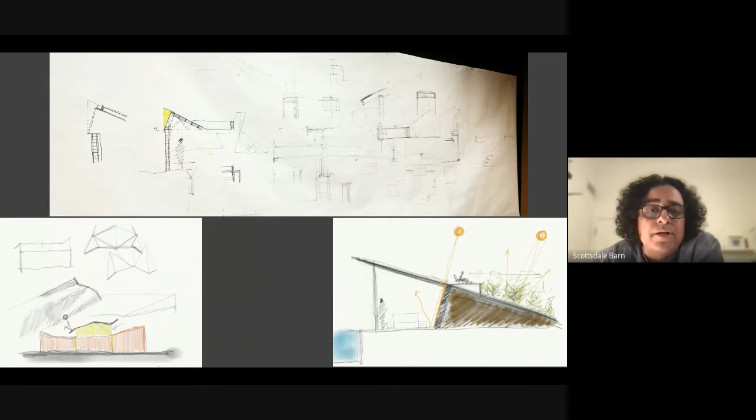On the right side, you're seeing a sort of a very freehand sketch that is talking about the sun, the angles of the sun on the solstice, and how to avoid that in the desert. And on the left side, again, there are discussions about how the sun is being prohibited from getting inside, because it's really harsh - it's about 120, sometimes 118 degrees Fahrenheit temperatures, which translates to 49 or 50 degrees Celsius in India.

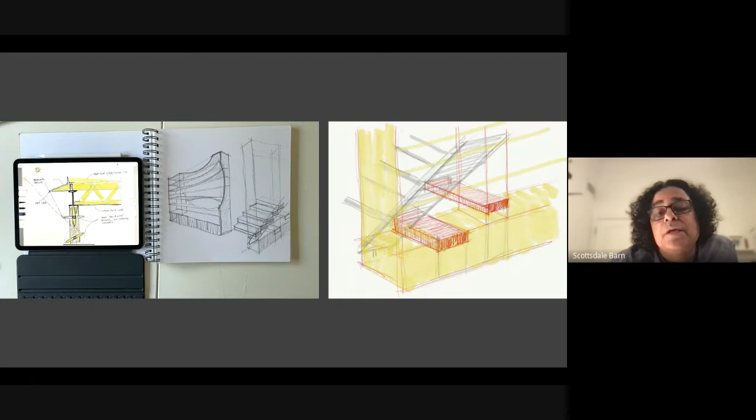And I work through different mediums. Sometimes on an iPad, I'm sketching something, sometimes on a sketchbook, sometimes I take my watercolors out and start sketching. So there's various ways how details can be manifested. You just saw that one detail.

This project right now is almost going to start construction. We are waiting for the permits to happen. It's for a NASA planetary scientist, and I'm interested in the sky, in the sun, in the stars, and all of that.

So this particular angle that you're seeing is actually facing the North Star. And the North Star, the pole star, the Polaris, is sort of the center of everything. Our human-centric Earth and the universe sort of moves around this pole star. And so I wanted to celebrate that.

This is a steel, aluminum powder coated aluminum plate that comes out that holds the glass. And there's a screening element on the top that comes out, and it becomes sort of a sunshade for that particular glass element, especially in the summer suns when the sun is rising low and it's hot.

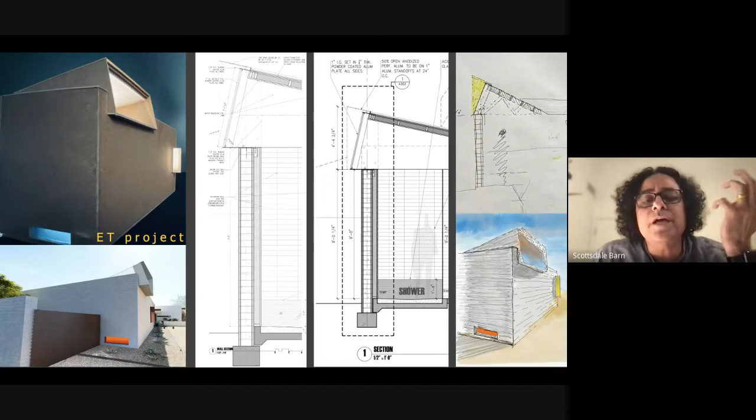So this is how we work in the office. We actually meticulously draw up everything.

Now we're going back in time. This is the Essence of the Desert project. This is the Sonoran Desert in Phoenix, in Scottsdale, Arizona. And this is where this particular site is. And so what happened was I was hiking once and I looked at these boulders and said, life can thrive in the shadow of the boulders.

And then a thought came to my mind, like, how can I make this into a house? How can this one image be translated, or this abstract image become a house? So what I did was I took one of these boulders in my mind's hand and pressed it, and it became sort of this plasticine wall, if you will, and it became this wall on the left side.

And that left side wall gave me this ginormous shadow. And then I said, the life of my client, the family of my client, can thrive in the shadow of these abstract boulders. So these are those boulders in an abstract way.

And on the top, that circle that you're seeing, that is the sun diagram for this particular site. So I'm studying the sun.

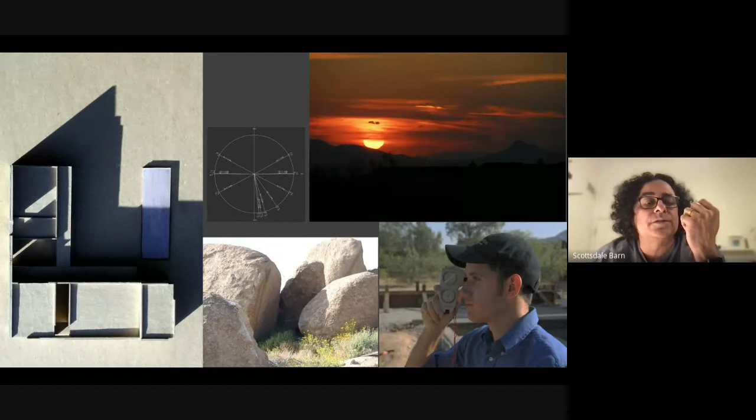This is my student, Trevor Pentecost. He's holding this clinometer, and we're starting to look at the angles of the sun, angles of the mountains, what the views might be. And when I did that, the sun said to me that you're turning your back towards these beautiful sunsets. And I started looking at how I can change something.

And so I made a notch on the right side, in which the sun was allowed, or by design, it sets in this particular notch on the anniversary of my clients. So detail becomes sort of the integral part of everything that we do in our studio here.

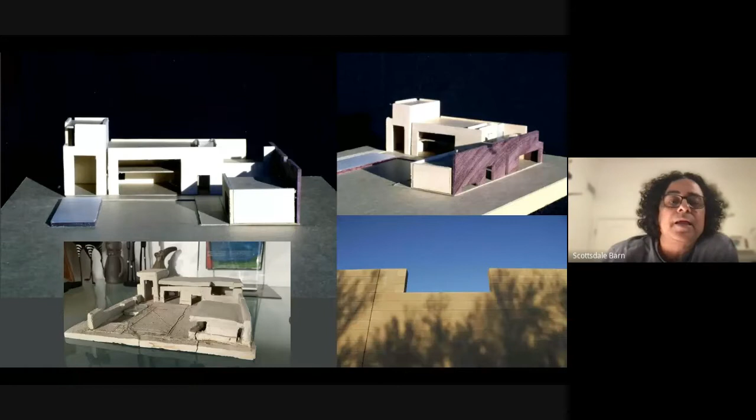It's not only talking about the poetics of the sun, but it also completely runs on the solar power, which is the pragmatics of the sun. So we are using poetics and pragmatics at the same time.

So you're seeing this living room right here. This becomes the kitchen, which is the heart of the American home. And then this is the family room, the kids' playroom right there, and a detached guest house for their in-laws to come and stay there during the winter months.

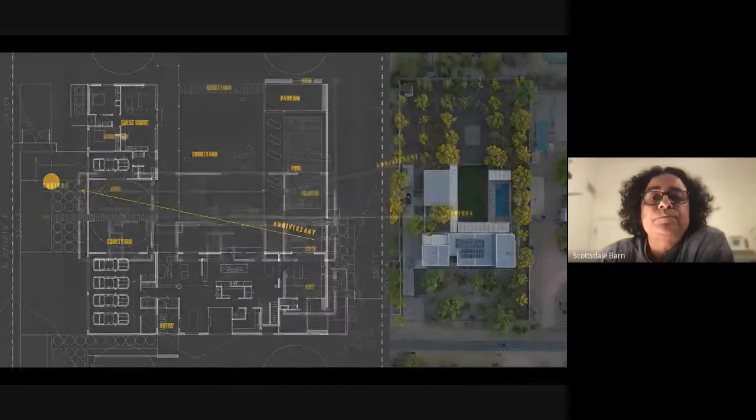And then above here is the loft. There are 2 bedrooms, and then a nanny's room right here. There's a gym on the other side and a deck.

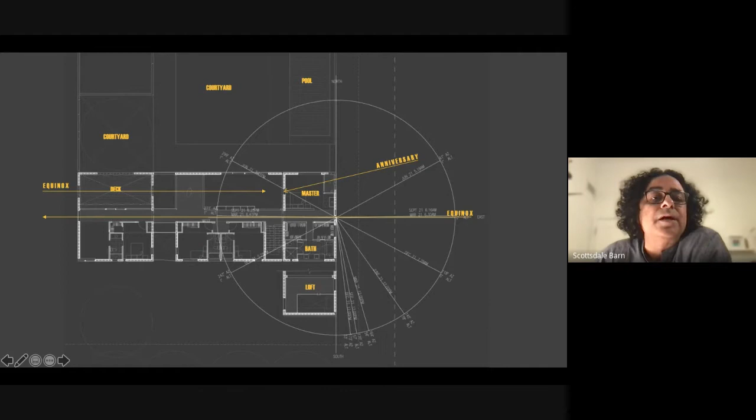So construction started, and during construction I was forced to invent a tool for the mason because I wanted this particular joint of the masonry so it doesn't hold water and seep in. I wanted that 45-degree angle, and the mason said he'd charge extra money. So I invented this tool for him.

To the extent of what detailing for an architect can go through, I had to invent this tool. It's a simple L angle welded with a flat bar, and then another flat bar on top that gets this angle inside. All he has to do is slide it across the masonry, and that generates this 45-degree angle. He was very happy to have these tools to give to his masons.

This is how the house was done. You're seeing the solar panels on the downside here, and this arrival court with the gate. You come in, there's a 4-car garage, and as you pull in, that same detail you saw earlier has migrated onto this house.

On the left side you'll see a joinery happening in the masonry. What happened was, when that particular plasticine wall I was talking about happened, I wanted to give that wall a presence in the front of the south facade, and that was very important to me. So I notched this south wall and brought the west wall to have a presence on the front facade of the house, because that was the first wall.

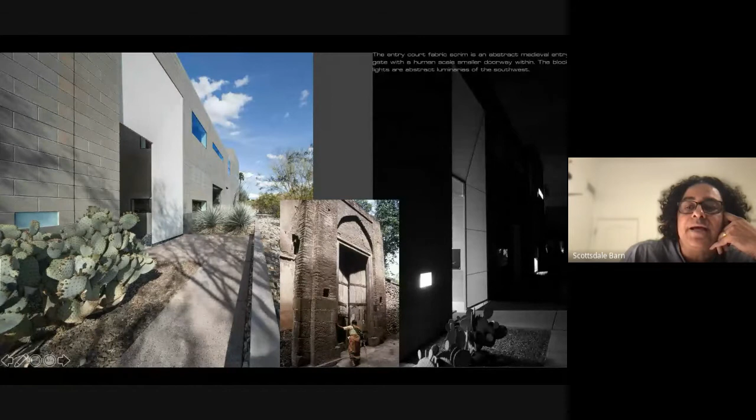Characteristics of the house—here in the middle there's this gate I'm showing, which is from the Sarsford, my mom's house where she grew up. I was inspired by this gate because it's corbelled. In India you'll see everything is corbelled. I abstracted that corbel to join these two corners and create this particular angle that you saw earlier.

When you look at this from the front, it has very small openings because it's facing south, and all the openings on the south are recessed in to avoid the sun. Whereas on the north side, I actually flirted with the architecture because the north light is welcome—it's a beautiful light that comes in, something to be cherished inside.

So you see this north side of the house. As you come in through the scrim, everything is perfectly aligned—there's an inside-outside relationship there. The door opens up, you're seeing the scrim, which actually drops the temperature by about 5 degrees when you're coming inside this little courtyard. Then when you see this entry door from the top, you see this alignment.

I'm interested in the precision of construction I was talking about—this glass has this half-inch gap, and that gap is perfectly aligned to the concrete down there, to the mullion here, and so on and so forth, and goes and aligns with the scrim outside.

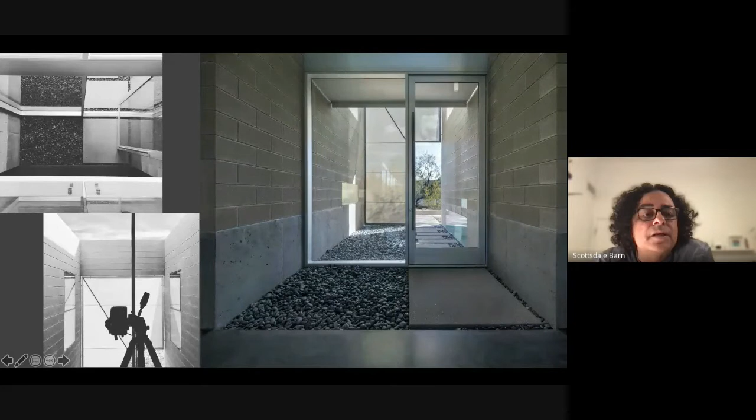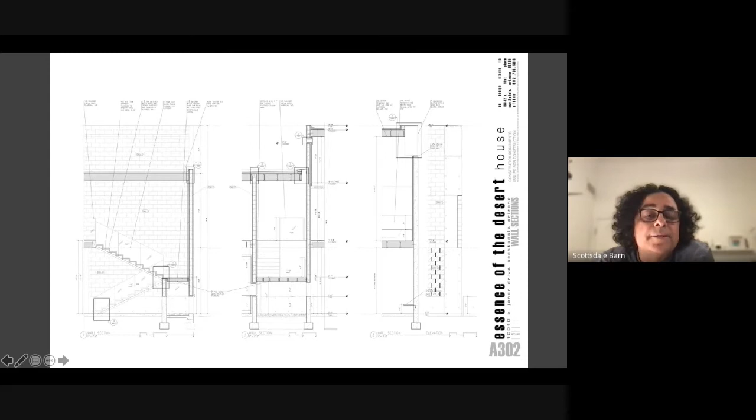So that scrim actually gives privacy to the kids' bedrooms from the roadside. Now you're looking at what happens when I show the wall sections. Let's look at these wall sections in reference to what I'm going to show you in the next slide.

So if you look at this slide here, on the left side there's 8 inches of masonry that is removed. Another famous quote by Mies is, architecture starts when you carefully put two bricks together. I kind of interpreted that differently. To me, architecture even happens when you carefully remove a brick from the facade.

And on the right side, you're seeing there is a bathtub, and that corner detail you're seeing, I removed that particular block from there. That suddenly allowed me to bring light into the bathroom.

On the left side, on the bottom, you're seeing that yellow line. That yellow line is glass. And again, that same detail that started as a morph detail from that jewelry box is allowing me to create this marriage of two materials, which gives birth to this eye of the Cyclops.

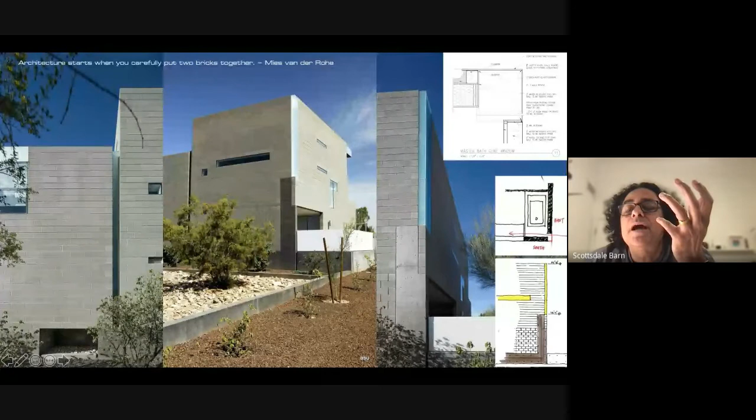On the right side, you're seeing how that detail is happening in the plan as well as in the section. On the top, there is glass. That glass is on the top here, but it's also in the plan. You're seeing how this particular detail is coming together.

If I go back now, look at this wall section here. This is the taller volume. What I did was remove the brick from the top as well as continuously here. That is allowing me to bring in this solstice light inside this staircase, and we'll see what that solstice light does.

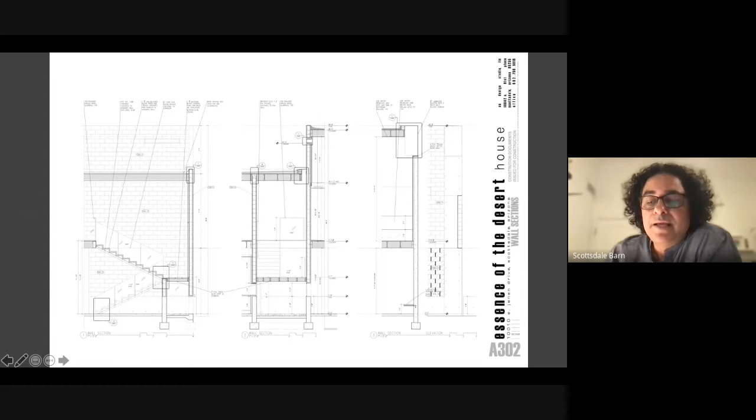And then here there is this staircase. Normally what happens is below the landing, people just typically store stuff. So I decided to give that landing space back to the outer space and created a window down there that gets this south light bounced inside and creates this ambient light. I'm really interested in creating ambient light in the desert.

So you're seeing the same detail here. You'll see the marriage of the concrete wall that is rising up, marrying to this. There's a fabric scrim here, and then the eye of the Cyclops on the top. On the left side, you're seeing this solstice light hitting that particular glass, which is actually bringing that beautiful light inside. Now let's go back to where we entered from.

This is where you come, and this is all concrete down there. And then there is a separation detail right here, which keeps the water out just in case any water comes in. This is outside space. The ceiling kind of flows and brings in that light, which again is an ambient light, which becomes an important thing and central theme of my architecture.

Here on the left side, you see that particular masonry joint that we created with that tool. It's concrete, integrally colored concrete on the floor. On the right side, you're seeing the kitchen, which is the stalagmite, if you will, that rises all the way to the second floor.

I'm interested in doing many things because this particular thing in the kitchen is a linen closet on the top. It's a mechanical unit here. It houses upper and lower cabinetry. It houses the fridge, it houses the ovens. And it becomes like a mass that actually houses everything in place. And this particular window, I want you to keep in mind, we'll come back to that later.

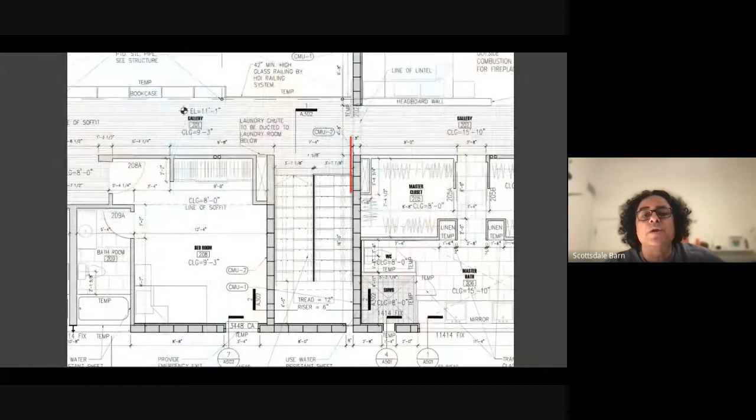So here now we are looking at a construction document where I'm talking about this one red line right there, which is a sliding door. That sliding door is the door to come to the master bedroom inside from the semi-public, semi-private area. You slide that door, you come into the master bedroom. Let's look at what that door is doing and how it is done.

And so when you climb this staircase, again, that same detail that you saw on that jewelry box, on that coffee table, on the outside, is now happening in the staircase, where the tread and the risers are married together, and then the screw becomes the detail. That same screw goes here in the handrail.

Outside here, you're seeing the mailbox, which is floating above this concrete wall. In the backyard, you're seeing the detail of how that particular piece of metal is held. Every particular thing gets a way of expressing itself. The column expresses, the beam expresses, another rod there expresses itself, and everything is put together, but they all have their own identity. And the way the column comes and meets the ground becomes, where two things meet, an interesting point to me, coming from Kahn-ian background.

Here you're seeing that particular slot from inside. This is that door on the left side, which hangs as an architectural detail on display in the light of the solstice. That brick that is removed from the front facade brings that light, but it also brings light from the sky.

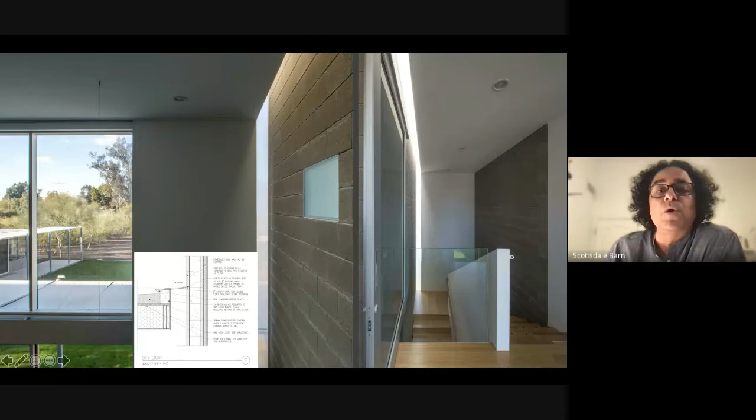This is that window that I was showing you earlier. This particular wall is aligned on the summer and winter solstice. So here's how the summer winter solstice light comes in, and it celebrates that moment in the house. It kind of helps you realize that we are on a spinning planet.

On the left side, that is the ambient light coming from the Native American house that we saw earlier in the Marble Canyon. And then you come back, this is that central spine that we saw earlier. That particular window out there is actually the equinox window.

We look at this, on the right side you're seeing the skylight, but you're seeing that same door parked on the wall, and it hangs on the wall as a detail.

All right, so you look back and you see that magenta wall that we saw earlier. That magenta wall expresses itself, and it lures you into the other side of the house as you pull through. And there's another door there which acts as a screen, to hide that light and obscure that light.

This is the living room that you're seeing from the top down. And this is what happens when you go to that magenta wall. On the left side, you're seeing the magenta wall here. This is a loggia to the gym, and you come out and you open that up.

You open, this used to be fabric. We recently changed that to the perforated metal that you're seeing on the left side. After about 13 years, the fabric sort of gave way and we changed that too. But originally, this is what it was.

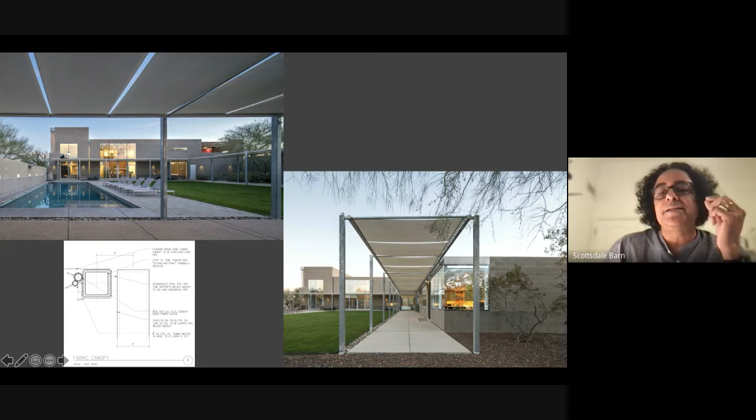It comes and expresses—the column is expressed, the tubing is expressed—and all of that gets an identity of its own in the architectural expression.

On the right side you're seeing the Modhera temple, which I visited in 2007 with a bunch of other American architects who traveled with me. On March 21st and September 22nd, the equinox days, you can actually see your own shadow inside all the way into the Garbhagriha. The same thing happens in this house—when you stand across that window, you see your own shadow spreading across 100 feet into the house. So detail and how the detail is expressed really matters to me a lot.

Here we come back to the master bedroom loggia, if you will. Look at this particular concrete cast that was made by my two students from ASU. There's a fabric curtain outside that adds sensuality to this master bedroom balcony against this really stark and stoic concrete block, and it adds this sensual way the fabric curtain bellows. It's the idea of diffusing this corner of the cube, and that's what this is doing. Again, you're seeing the fabric down there.

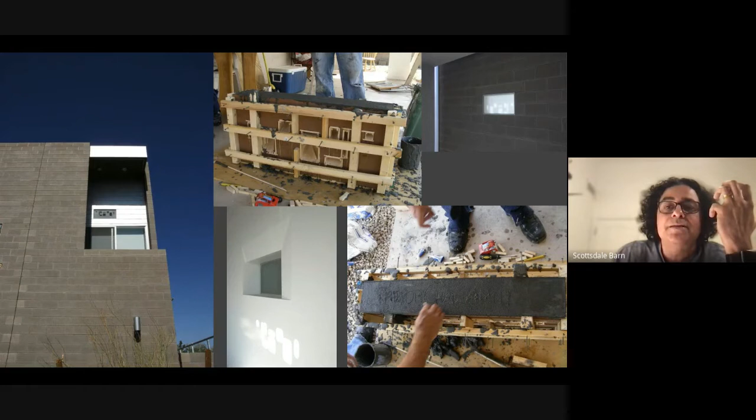This is how that particular cast was made. We made it using the sun angles of their wedding anniversary, and we wrote our names for the archaeologists here. That cast is now on this balcony right there, and when the sun hits it on May 3rd at 7 a.m., it shines through this window for just 2 minutes. The amount of work that goes into creating that effect is absolutely tremendous. The sun also sets into that slot on their wedding anniversary at the same time. This comes from my sketch of Chaco Canyon in New Mexico, from when I was here as a graduate student.

And last but not least, the detail of the hands of the entire family is in the cast-in-place concrete. With that, I move on to another project called Summers.

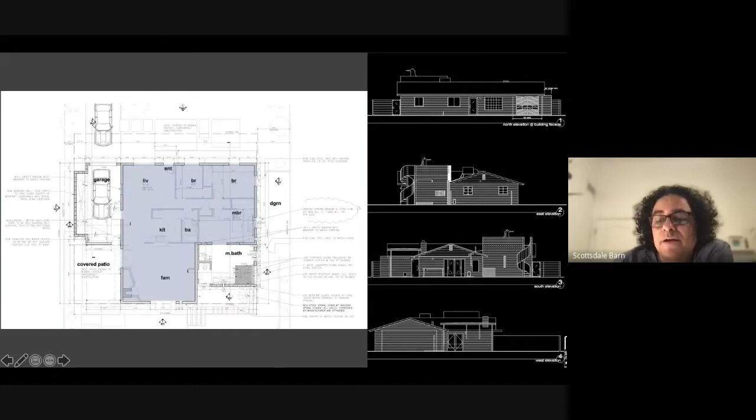This was a remodel project. The house is very small, about 1,800 square feet. The gray portion of the house is where I'm not touching—that's existing. I'm only adding the master bedroom and master bathroom to the right side corner, adding a garage to the left side corner, and creating something to the front of it. These are the drawings on the right side, and this is the finished product you're seeing.

You're seeing the fabric eyebrow out there—I'll talk about that in a second. There's a rain collector, a rain harvesting channel out there. On the left side, you're seeing how the fabric is mounted. I took a 2x2 galvanized tube steel, which is mounted underneath into the old wood we're seeing on the right side here.

The gutter collecting the rainwater is closed off here, so I can divert all the water to the other side. From underneath, you have a countersunk screw that you don't actually see—it's flush with this thing. Then these are lag bolts bolted into the fascia, and the fabric comes and is held by the lag bolt and the flat bar that keeps the fabric tight and taut.

So on the other side, you're seeing the channel comes out—this is nothing but brake metal, Galvalume, which is galvanized aluminum. You break the metal like this, and the channel pours the water into the cistern that we collect for rainwater harvesting.

Here, we're doing the same thing on the left side—the channel comes out, you're seeing that. This is the construction. Here's where I'm trying to utilize the existing masonry to reduce the cost of the footing, so I'm taking these columns and mounting them on the side by grouting the masonry.

We cut this open and brought this in, and we put this channel here—the gutter—that collects all the water and brings it down. You're seeing this channel right there, the gutter comes out, and this gap allows me to take the hot air out. Suddenly you get this beautiful patio in which you sit and enjoy this breeze coming and going. This channel comes out and expresses itself as an architectural detail.

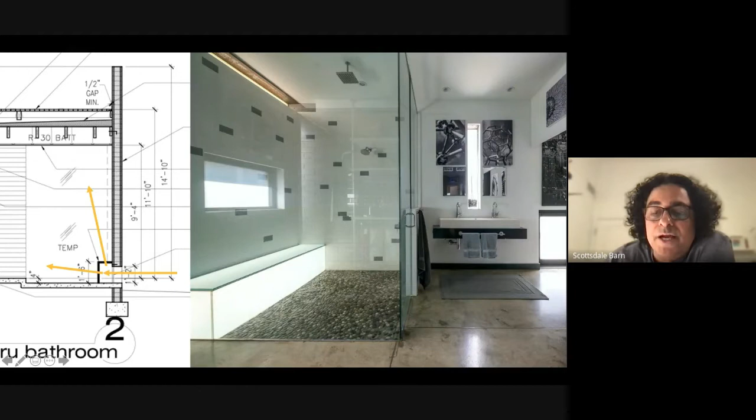So this is the brightest this particular bench in the shower shines. And as the sun traverses through the sky, the intensity of this bench diminishes. And all the way in the evening, that same bench becomes a lantern. And that is all powered by the solar energy. So again, I'm talking about the pragmatics and the poetics of the sun right here.

In their garage, we have introduced glass into the masonry, and that masonry shines when they come back home. This particular wall brings in daggers of light into the garage, and the skylight from the top allows him to work. He's a woodworking guy who likes to do that, and that's what the light is on his woodworking bench. But this particular glass slots bring in light.

I'm moving on to the next project called Ashar. It's for two Indian doctors from Mumbai who live here in Chandler, Arizona. And they came to me and said they want to remodel the house. So we imported all this stone from India. It's the Kota stone. And we separated all of that from the old and the new, and with this river rock.

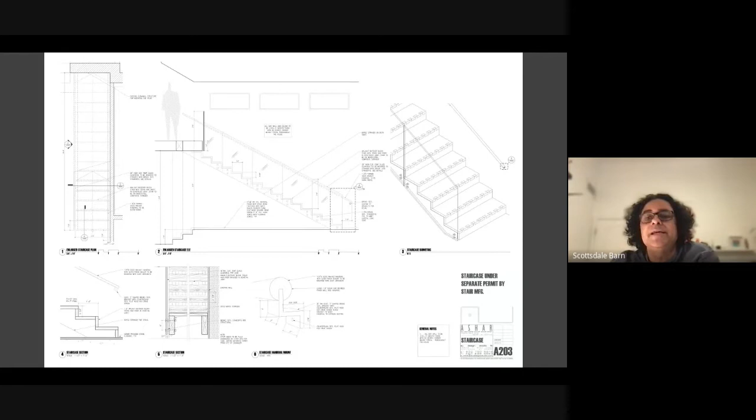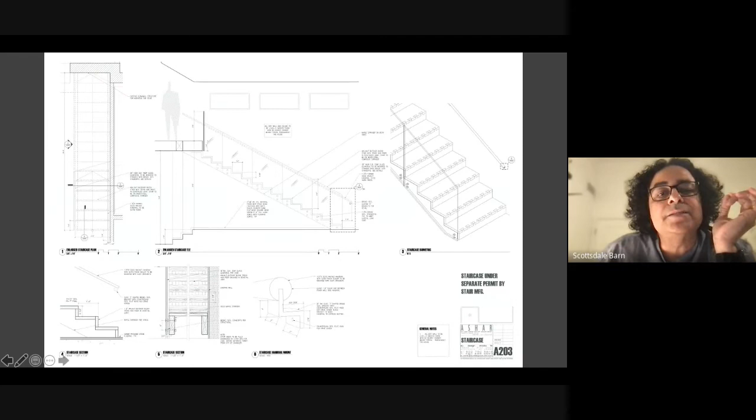And here you're seeing the detail of a staircase. Now you're seeing that same detail that started from that jewelry box has morphed into a finger joint now. Look at this finger joint into the staircase, and that staircase is held by this maple stringer, and then the stairs is made out of walnut, and there's glass out here, and you will see how that particular thing comes together. So here, this is the detail, that finger joint happens right there, and it's almost like the carpet created out of wood, and it's a beautiful thing to walk on.

It's very easy to go up. There is a detail right here, how this particular handrail is mounted to the thing, and here you can see the glass is mounted to the maple stringer with the walnut stairs. Here, there's a close-up to that, and then the same detail gets

implemented into their kitchen countertop, and you can see that detail right there. This is their breakfast area where the kids are getting ready to go to work, to the school, and that particular detail ties across the house. This same detail happens on the stairs. So I love to tie details across like a string that holds the beads of a mala.

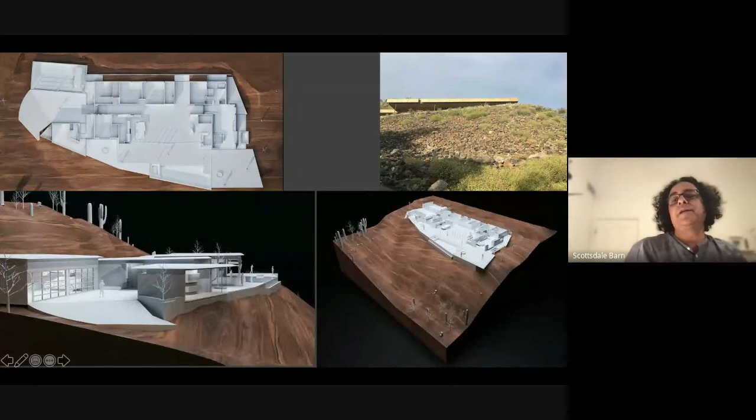D-Lap house, this is under construction now. So this is on the right side. This is how the house was abandoned by the previous client, and this is how I was brought in to do something with this house. And so I took over.

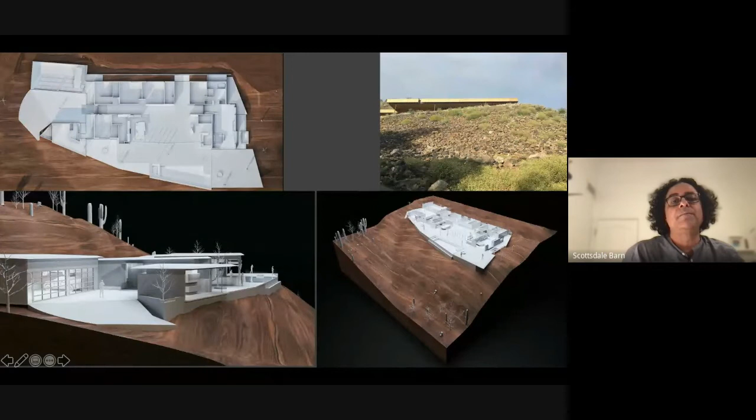And this on the top right side, left side, you're seeing the plan, and on the left side bottom, you're seeing the driveway that comes into the motor court, and then there's a 4-car garage right there. That garage is right here. You come to the motor court, and this is the entry that comes in, and this is the living, dining kind of kitchen kind of space. All the bedrooms are at the back. The master suite is right here. And I was inspired by the prickly pear.

That earlier picture, if you remember the flora, there was that Fibonacci series. That prickly pear leaf, when it dries, has a pattern. I started studying that pattern and seeing how I could use it in architecture.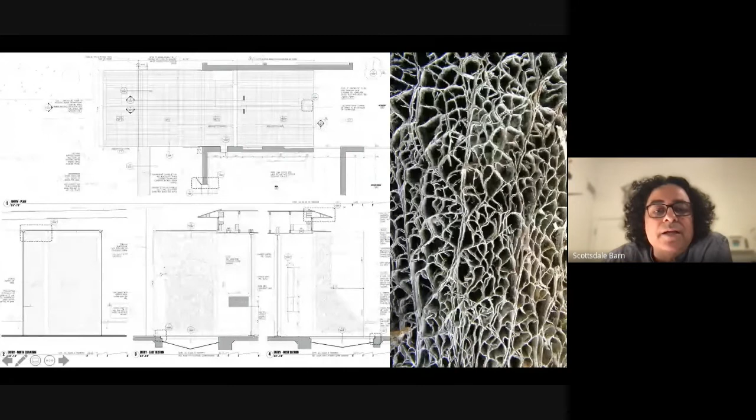These are the two sections. I cut open this thing looking left and right. You're seeing this pattern kind of abstracted into this scrim, and this scrim is a digital model of that. There's a bench that is actually luring you to the entry.

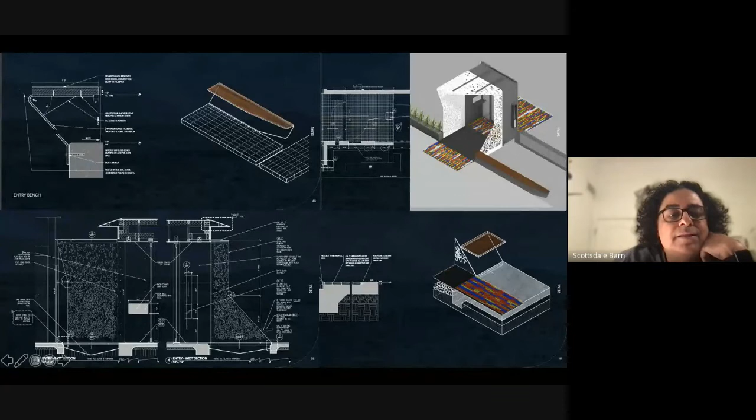There's a carpet of tiles embedded into this particular grating on that bench, that detail, which is anchored into the concrete, and it goes out and comes back, with a wood piece on it. This is the same section you're seeing on the right and left side, and that is the bench in the digital model, that is the scrim, the abstract pattern coming from the prickly pear thing.

This is still under construction, but someday I will show you the finished product. Look at this detail on the right side. This particular window has this human emotion again.

So I'm interested in the ethos. By creating the ethos, I need to have the logos, which is the logic, and the pathos, which is the emotion. Both of them, when they come together, an ethos is produced.

This detail of this particular window is about the human emotion of anticipation. When you're throwing a party and waiting for the guests to come, your ears are heightened, your hearing is heightened, and you may sometimes hallucinate. You may feel somebody has knocked on the door, but there's really no one. That heightened expression of hearing is what is expressed in this particular window.

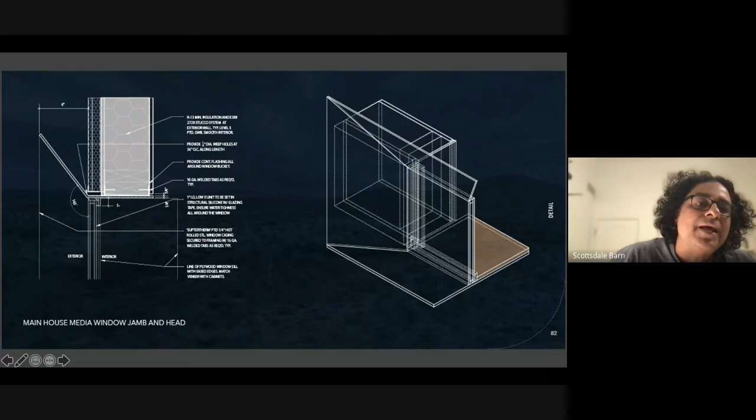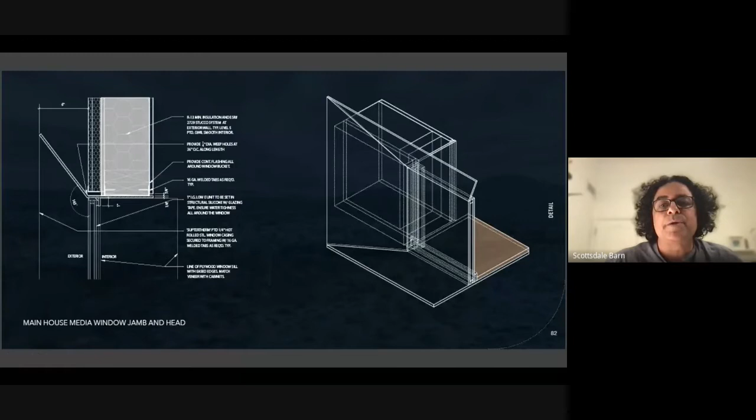If you look at this detail in the section, I'm taking the steel and bending it up like the ear of the house, as though the ear is perched up to listen to what's happening and awaiting for somebody to ring the doorbell. It expresses that particular human emotion, because again, it's for the humans, by the humans. This is a section through the mountain, and that's the sectional model you're seeing on the right side.

Again, I'm interested in the sun and how it traverses through the sky. Here's the model of these sun louvers, because this entire facade has this beautiful view, but it's also facing the west. So I have the responsibility as an architect not to blast that sun on the glass and increase the carbon footprint.

So what I did, I created these aerofoil louvers, and they are constantly tracking the sun. The moment the east sun clears the mountains and comes to the west side, it starts tracking right here. There's a detailed sketch I made on my iPad. The sun angle is studied from 1 o'clock onwards, and how these louvers can actually block that sun and create shade. As the sun moves to the west, these louvers are tracking like the leaves or the sunflower. That's the detail of that.

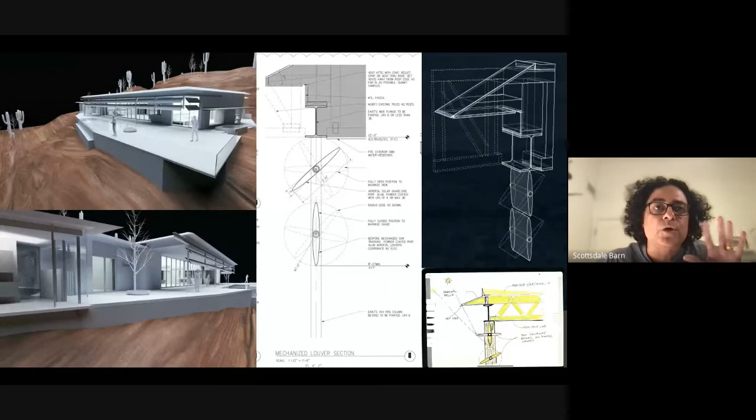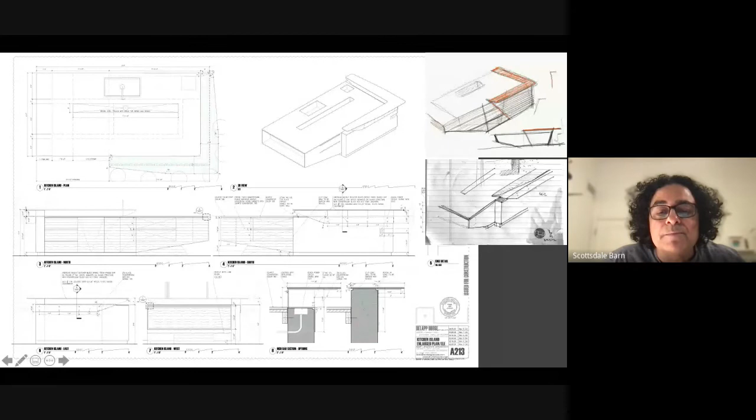Right here, there's a detail. These are the elevations, and the steel plate is holding that particular fiberglass, the color high-raised bar. Then these are particular details: this is how the electrical panel comes, switches come in, and you can actually sit here, put your computer, plug your wire in here, and plug it in.

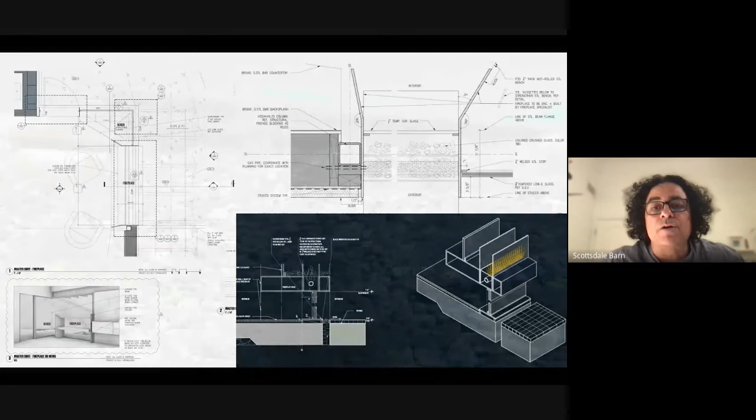On the right side, you're seeing the detailed plan cutting through the fireplace and how it is held by the column, how it is connecting to the wall, how I'm bringing the gas inside here. And on the bottom, you're seeing the particular models that we created a book out of. There are 150 details that we created.

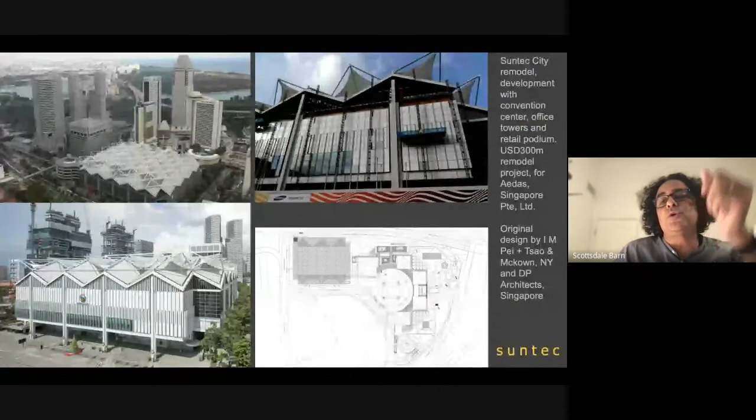And then I'm going to go to Singapore. I'm going to show you what I did for Aedas in Singapore in 2010 to 13. This is a Tsao and McKown designed building. They are two students of I.M. Pei, and I was hired by Aedas to completely change the facade of this entire complex, not the towers, but the 4 floors. And then these are the new facade that is being built on the right side.

On the left side, you're seeing the convention center, which is a huge space frame. This entire space frame is actually the structural frame that is hanging all of these floors from the top. So these columns go up, the frame comes down, and then all the subsequent floors, 7 floors, are hanging literally from this space frame down.

So all the columns inside are in tension and not in compression that we are typically used to. And this space frame is so big that an entire 747 Boeing can be parked inside. So this is the particular space frame. These are the 4 towers on the side.

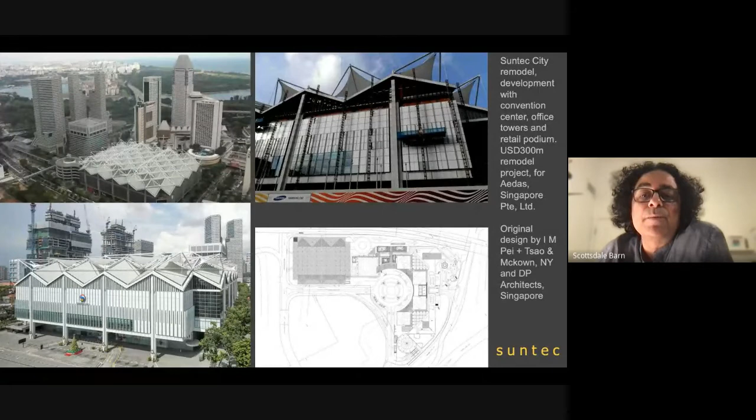Then there is a fountain in the center, which was the world's tallest fountain in 1996 when I was in Singapore earlier. So what I was posed the challenge with, this is the state of the fountain when I took over in 2012, and they said, we need to change this fountain.

These are all the retail and food and beverages, and they're suffering because this fountain is in a dilapidated state. So I was standing on the corner here, and they turned the fountain on, and I saw a rainbow in the midst of this fountain. And I said, I got to capture this rainbow somehow.

So what I did was I took all this glass out. I exposed this, this is where the glass was, and I extended all of that concrete slab out. I created this metal angle out here. And then on the metal angle, these are custom stainless steel bars that are mounted to hold this handrail up there.

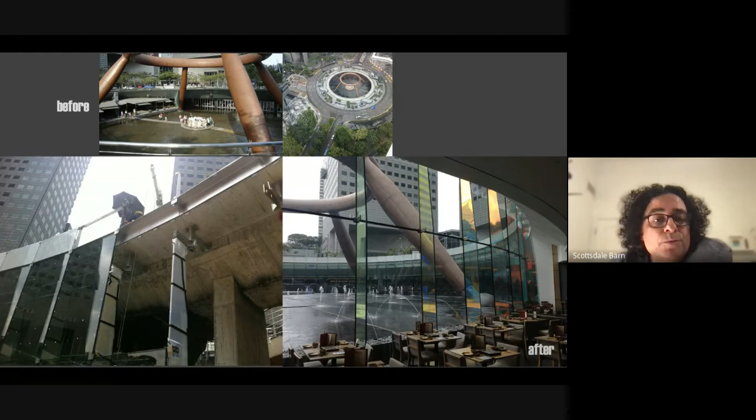And this became sort of the tallest glass in Singapore. It is 18 meters tall by 2.8 meters wide, a single piece that was manufactured in China. And then all of this glass got connected here. The glass continued outside and became the handrail.

And then inside, we mounted glass fins, and these glass fins are dichroic in nature. They have iridescent glass, as we call it. So as one moves into the space, this film, which is the integral film in the thing, it actually changes the color and captures the colors of the rainbow. So that was the last thing that I did in Singapore.

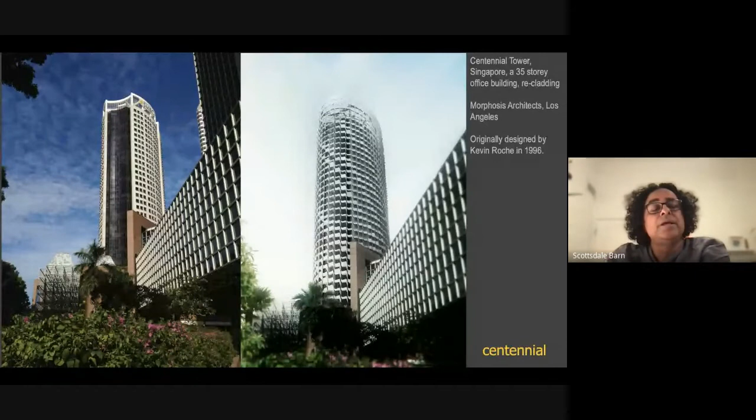And then I was moved to Los Angeles in 2013 by Morphosis Architects. And then I was thrown back into Singapore to create this transformation here for Kevin Roche's building. So this is on the left side that you're seeing, and this is the right side, the transformation that happened. And we'll briefly see how that was done.

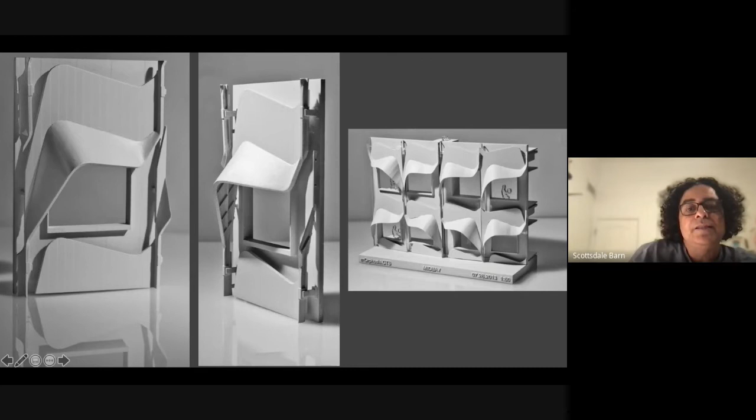When I took over the project, these 3D models were already printed. They gave me this and said, Amit, we got to make this a reality. So I started working on these models, and how this particular thing was going to take shape, we will see in a minute. So what we did, we made drawings.

On the right side, you're seeing the drawings that we made in the office, but then they became the shop drawings of this Japanese contractor. And these are panels, and this is a mock-up of that panel, which is on the right side.

You're seeing the shiny one is this 316L stainless steel, which is held by 6061 T6 alloy aluminum, which is used in aircrafts because it's light and as strong as stainless steel. You can hang all these panels using that because it's easy to mold. On the left side, you're seeing the aluminum one. The client liked the shiny one, and we went with that because it was also stronger.

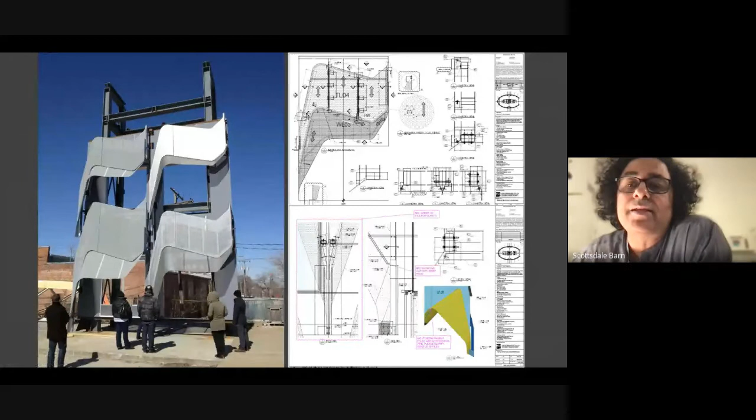These are some of the most beautiful shop drawings done by a contractor. We approved all these shop drawings and finally it got built. There are 35 floors of this 316L stainless steel acting as a sun shading device, dragging that building from a static facade to a completely dynamic facade of the 21st century. You're seeing the columns also clad in stainless steel, and these beautiful panels.

Coming back to the scale of the details, this is all the detail that went into the house, and we created these beautiful 3D models, creating a city of details. So detail has no scale. Anything large can become small, and something absolutely small can become large.

Wow, great, Amit. It was indeed a stunning presentation. Really, really fantastic presentation.